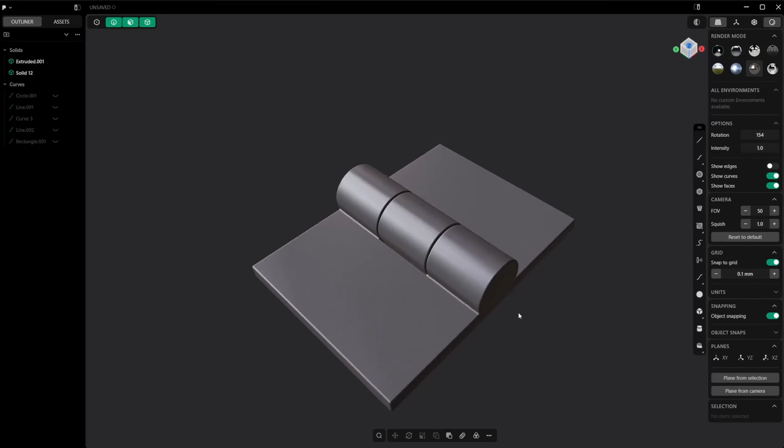Let's make this print in place hinge in Plasticity. I'm going to start with a new scene as always. I'm going to select my perspective view and turn on snap to grid. Then I'm going to pick my center circle, and from the origin I'm going to drag out. I'm going to hit V so that I make sure it's vertical, and it's going to be 14 millimeters. Probably it's going to be okay, I think.

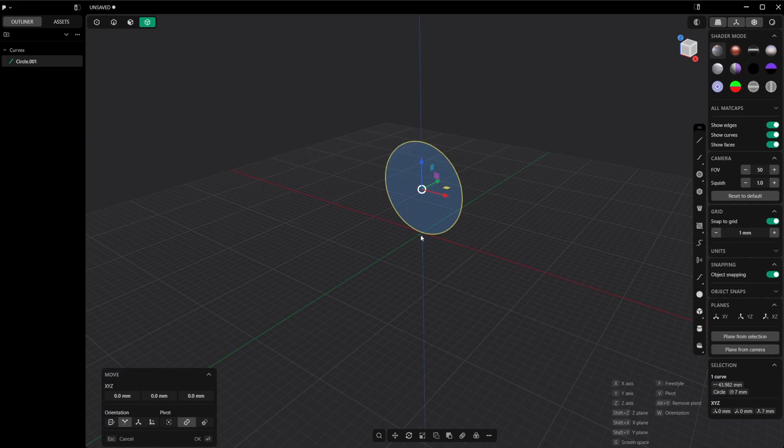Then hit G, F, click this middle point here and bring it up. Now, if you consider this perspective plane as the print bed, you're going to notice that the circle slopes up very gently. This is going to cause some artifacts around here because the filament is going to droop down. Usually I don't mind, but in this case it's a mechanism, so it's probably going to impair it. So I want to make the line that goes up from the print bed a little steeper.

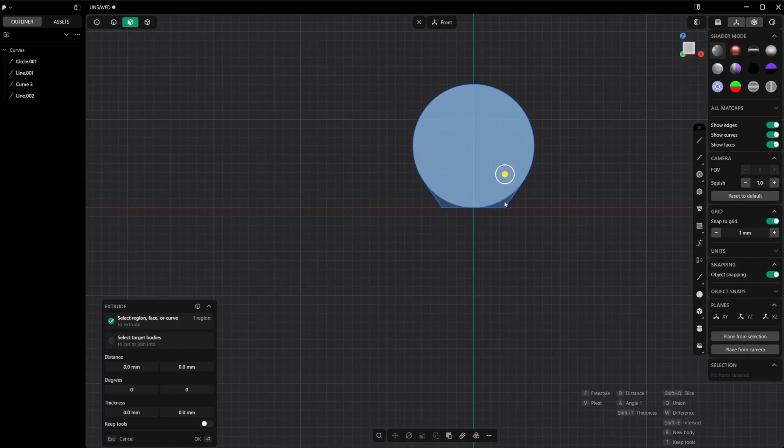I'm going to select my line tool, making sure I got this tangent constraint going on. You can tell that by the purple line. I'm going to click, then mirror on the other side, then get my line tool again and connect the two vertices. Effectively, we have created this new hinge cylinder shape. I'm going to push it out, let's say something like 16 millimeters.

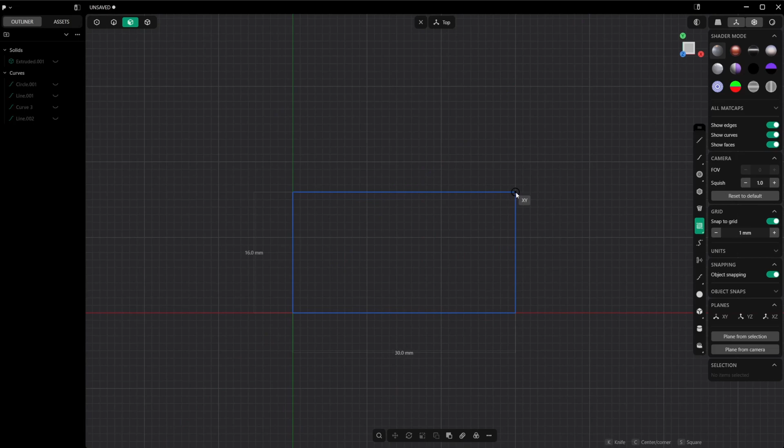I'm going to hide my curves for now, I don't need them. In fact, I'm actually going to hide this as well. I'm going to go to my top view, and I'm going to make a corner rectangle for the flat part of the hinge. So it's going to be as long as the other, which is 16 millimeters, and maybe 30 millimeters long. I am going to re-enable that, and probably something like 3 millimeters is enough for the thickness, even 4. Actually, let's make it 4 millimeters.

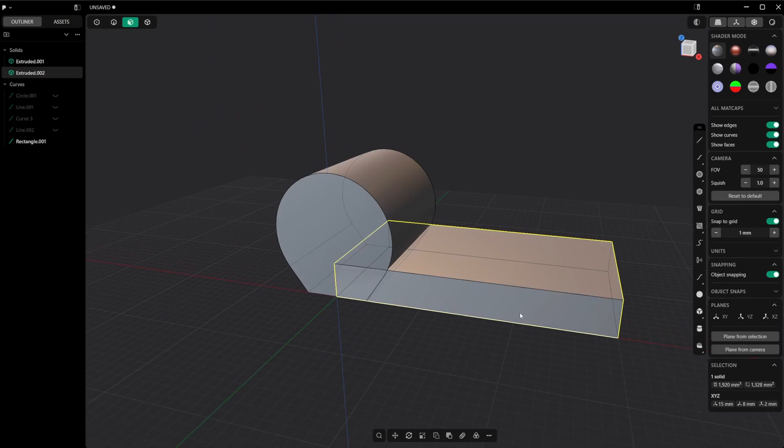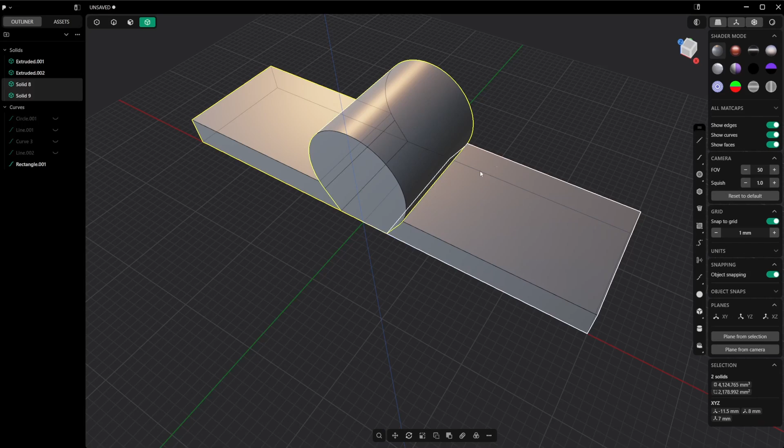I am going to hit Q with this selected, select the mechanism part, and hit T so that we keep it, to remove the extra chunk that we're not going to need, otherwise it's going to get in the way later. Now I want to mirror this, so Alt X, we're going to mirror it on the X-axis, making sure that we do not cut down on the mirror plane, so that we create a clean copy. Hit OK, and with this new copy selected, I'm going to hit G and move it away. We're going to match this face, so 16 millimeters is going to be fine.

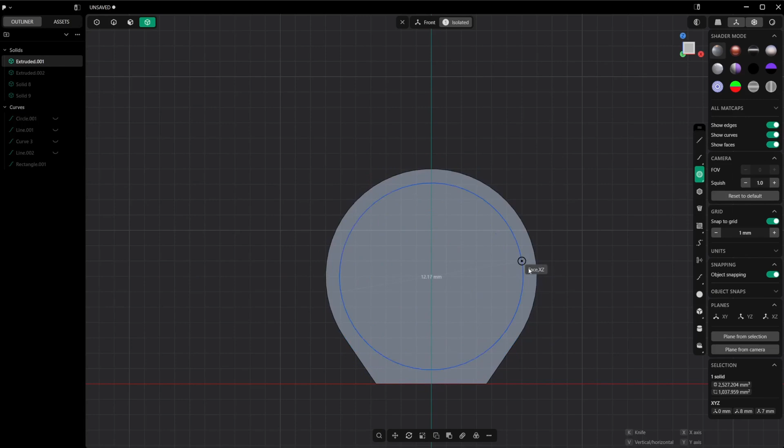Now we're going to create the mechanism proper, so I'm going to select this one, then the circle, go back to the side view, and from the center of the circle, making sure it's the actual center, you can tell because if you snap it, it's going to create the actual circle. Making it something like 10 millimeters, because we want a little edge. We're going to push this out 3 millimeters, and then chamfer another 3. We're not going to need this circle probably, so I'm going to remove that.

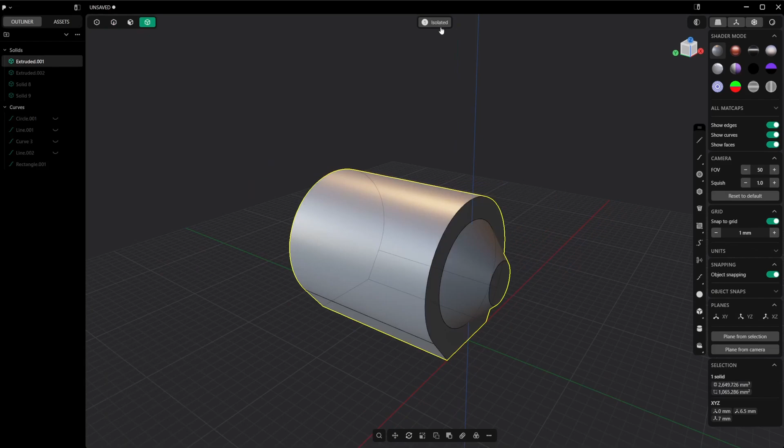I'm going to select both these, QQ, and then unisolate, select the other part of the hinge, Q, select this one. When it turns red, it means it's removing. If you hit Q twice, as I did a second ago, it's going to merge it. If you hit W, it's going to remove it, which is also the default. Hit T to keep that, and enter.

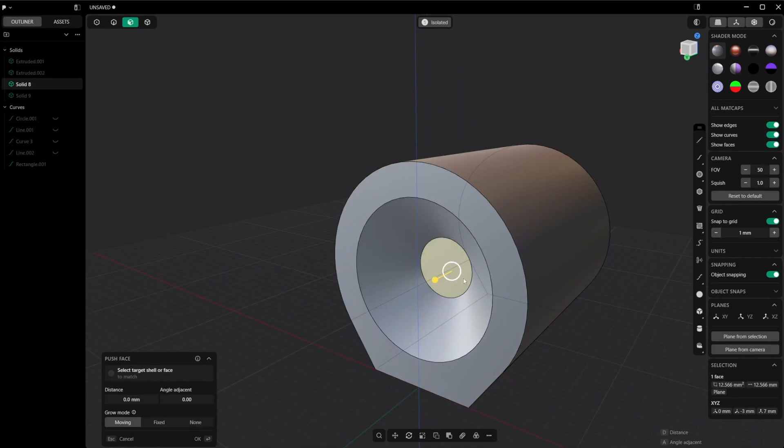So this is our mechanism, except now they are sticking to each other, so we want this to be a little larger. I'm going to disable the snap to grid for a second, probably 0.1 clearance is enough. Let's make it 0.2. 0.2 is actually standard, so minus 0.2. This should be plenty for our mechanism.

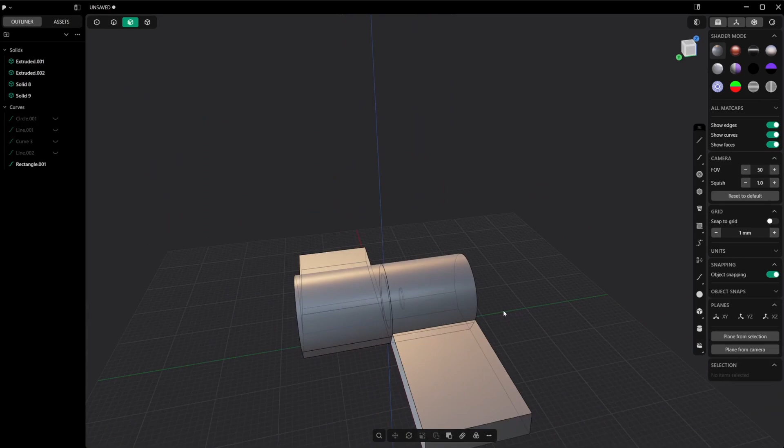So this is almost done, except now, again, these are sticking, so we want to create a little bit of space here. We're going to do it on this side. So I'm going to push this. Actually, let's turn on snap to grid and snap 0.1 millimeters. It's going to be a little easier, 0.2. Unisolate.

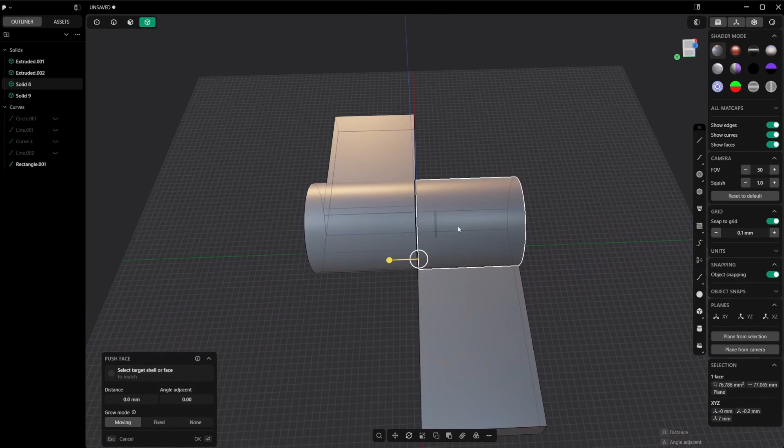So the problem with this is that if we print it as it is now, it's going to fall apart. Obviously, this is not a hinge. So we're going to have to mirror this or this to the other side. I think I'm going to go with this one.

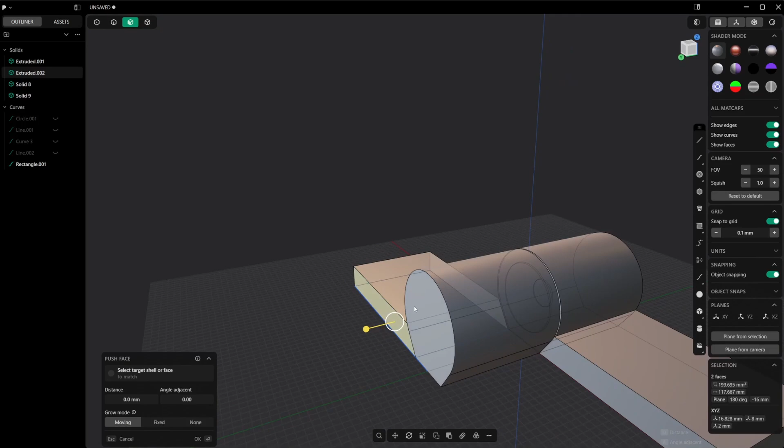So I'm going to create a new mirror plane. I'm going to select this and this. Shift space to create a plane in between those and select these two. I am going to mirror them on this axis and hit enter. I'm going to remove the temporary plane. Now this is a hinge. It's a little weird, but it is a hinge.

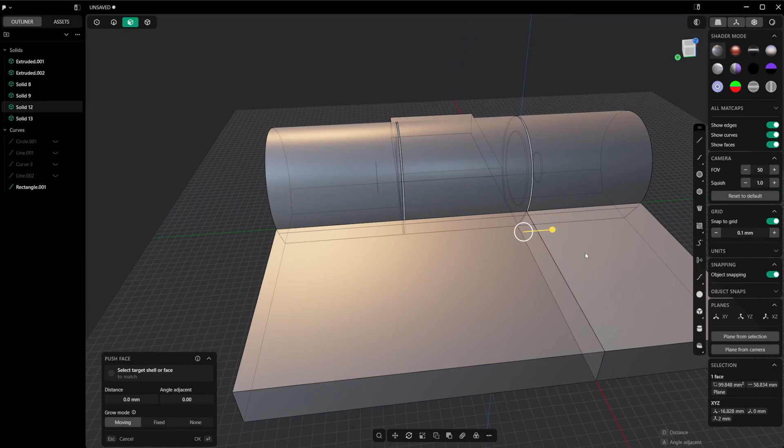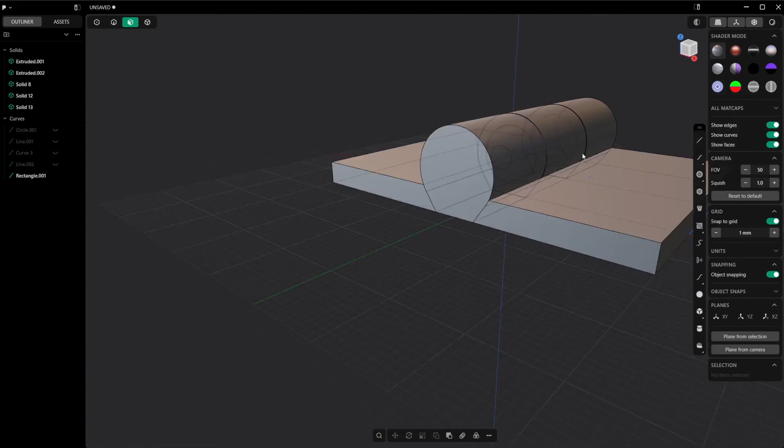I'm going to push this to the other side, and then I'm going to select both, QQ. I'm going to extend these as well, because they will need to be extended. And let me turn back on the 1 millimeter here, because otherwise it's going to be a little strange. So push it out so that it matches. So this is our hinge. I feel like maybe we should make it a little longer. We're not done yet, but let's push it another 3 millimeters, maybe.

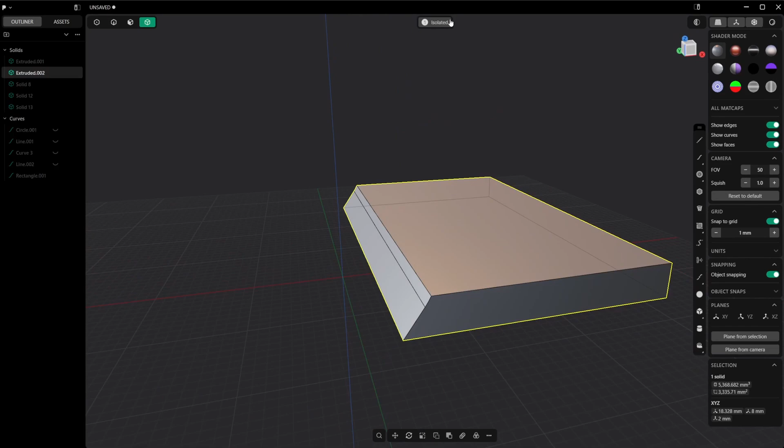Now, it's looking pretty good, except the problem is there are some parts that are still sticking. Specifically, what we want to make sure is that this edge here does not stick to the center of these, or to the side of this cylinder thing here. So we're gonna select both of those, and I think it's safe enough at this point to merge them together. I'm gonna see if I can FRED, delete redundant topology.

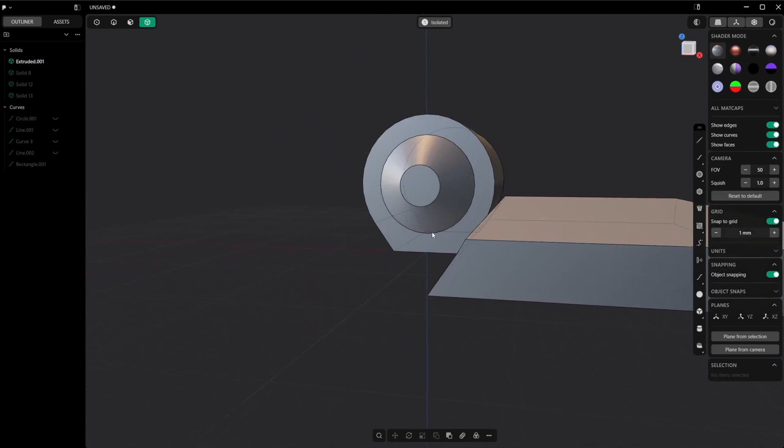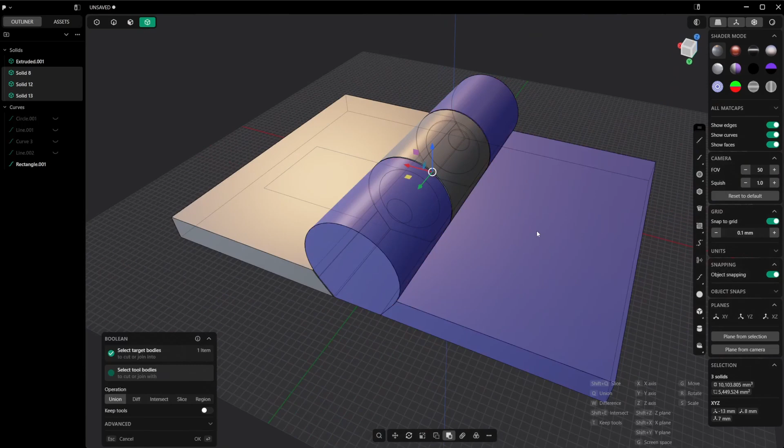There is none. We're gonna push these faces in ever so slightly. Let's reduce this again. Let's do 0.2 probably. And we're going to do the same here. We're going to select these. In this case, this is the right side of the hinge. QQ. Merge them. And then we're going to push this one in. So 0.2. And I think this is looking good.

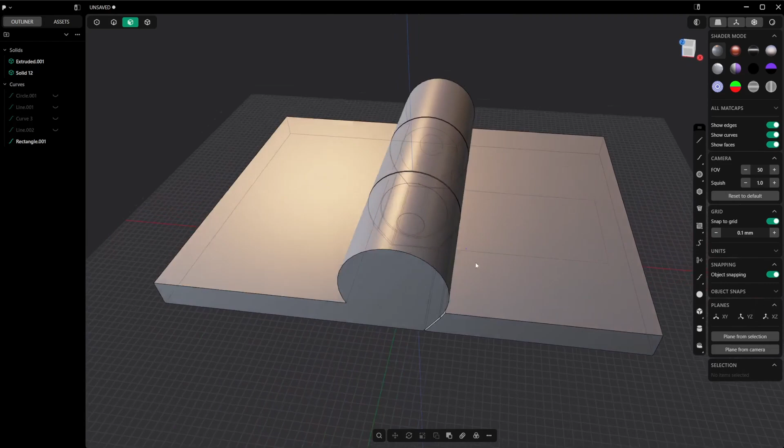Technically speaking, this should already be printable. It's just going to look a little sharp if we do it now. So why don't we go ahead and add some chamfers. I'm going to select only the ones that I need. So we probably want, actually, you know what? Let's go ahead and select all of them except the base one. So all of them except the very base edges.

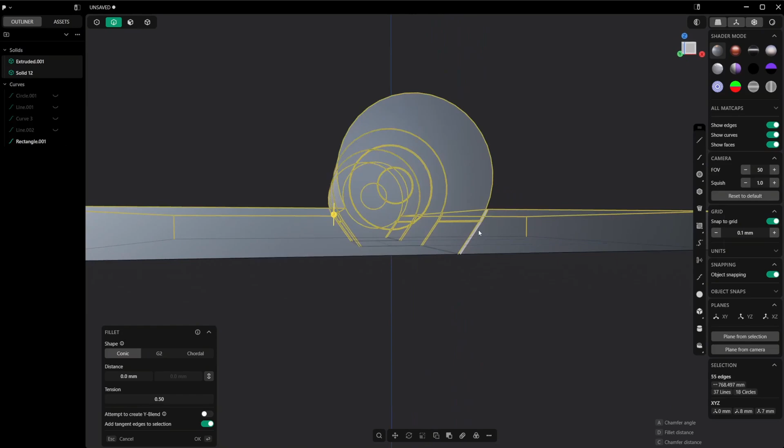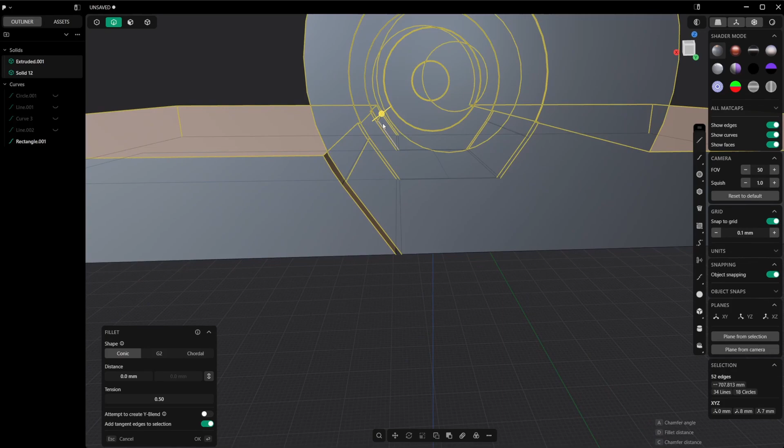And this one should also be selected. Let's make sure these are selected properly. We also do not really want the middle ones. Actually, so let's control click this, not that, this one and then this and that. This one needs to be removed as well, and I think we're good.

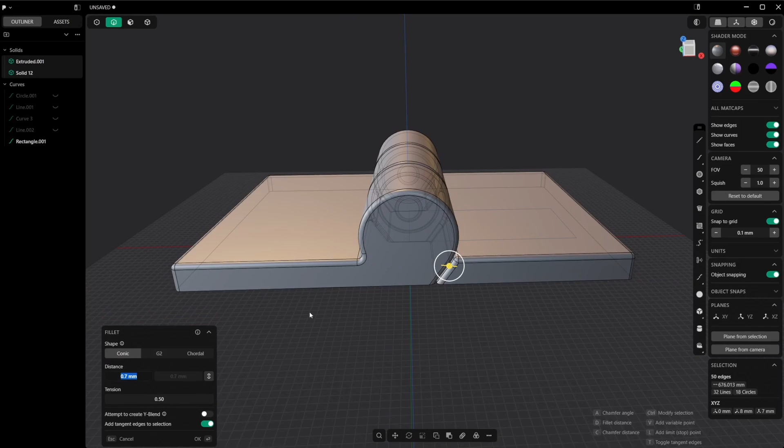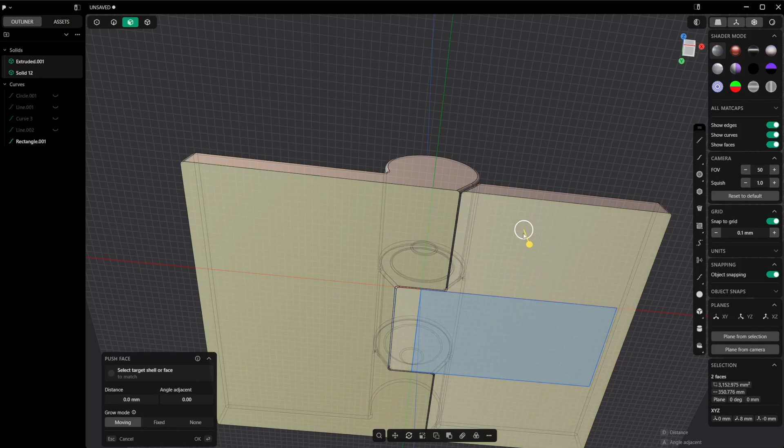So let's try with a chamfer now, or a fillet. I'm going to push this, and I'm going to make it probably something like 0.7. Yeah, it's going to be enough. Let's check it. Yeah, it's looking pretty good. And for the bottom, I could have used the fillet as well, but as I mentioned before when I was talking about the circle, if the angle is too rounded, when it touches the print bed, it's going to create some artifacts, so we want to avoid that, ideally.

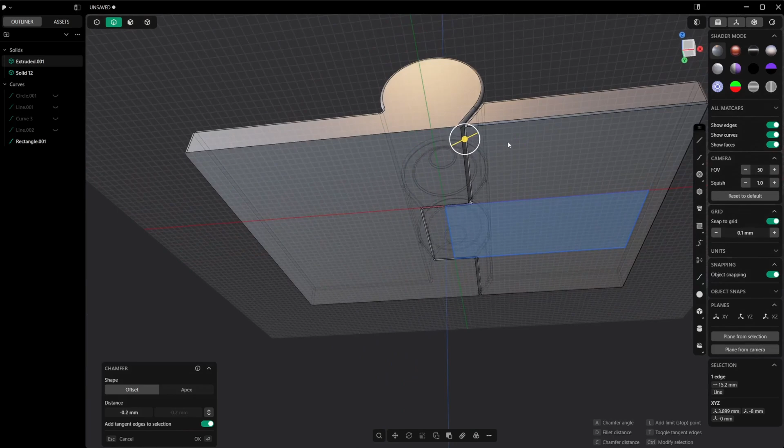In fact, now that I see this, I'm probably also going to give it a little more padding around here on the pointy edge. So let's see if we can do it. Well, it's going to select all of it, so it doesn't change anything. I'm going to select the bottom faces with 3, and then Control 2 to select the edges. Bevel with B, and then C for chamfer. And I should be able to push these in. And I'm going to make this 0.4 as well.

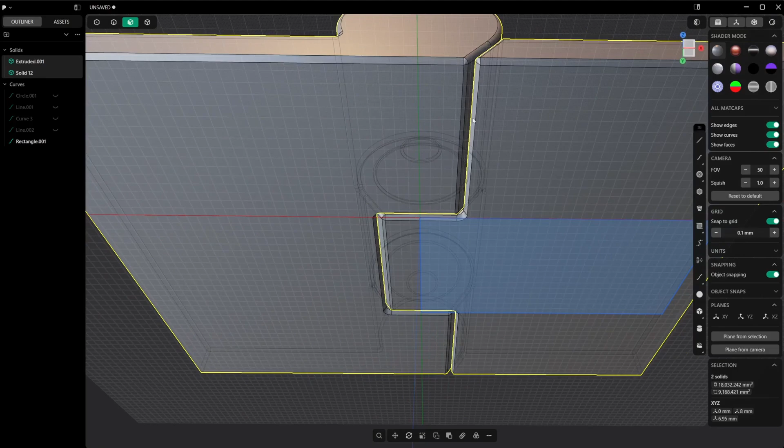Honestly, I think this should give it a little more space, but it's going to create an artifact if I do that. So I'm going to leave it as it is. All right, I think this is pretty good looking. And why don't we go ahead and print it.